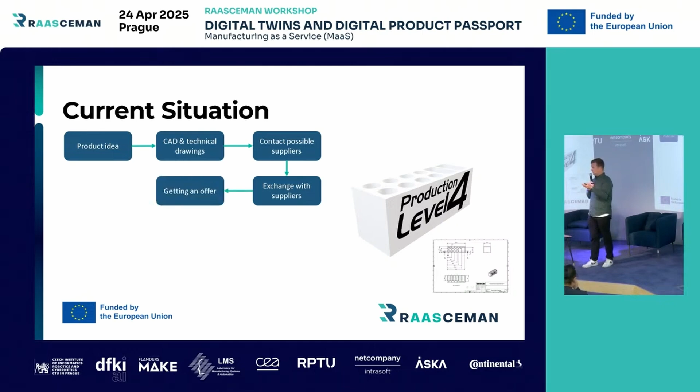After that, you get an offer. Then you decide on your side if it's good or not. When it's not good, you go back to the CAD file and take the idea or information from the supplier to redesign it every time. Or you accept the offer and let the product be produced for you.

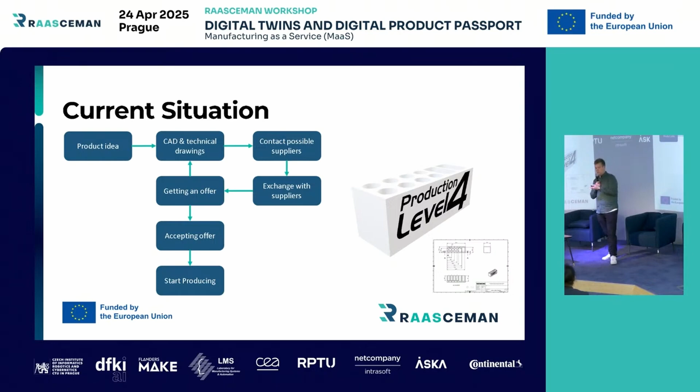Now I come to the theoretical part of manufacturing as a service. Manufacturing as a service is a digital marketplace for manufacturing capacity that enables the free capacity of your factory to be shared with everyone on earth. It's a global connectivity, and when the capacity is free to use, it's also on-demand production.

The advantages of this are cost-saving. When you are producing every time, you are making money in that case. The speed is also there because free capacity is used, and you also have scalability to different suppliers to produce the same part at the same time. There's also sustainability because there's no downtime where the machine is running.

After that, I will show you the requirements for such a manufacturing as a service. That starts with the lowest point, the Industry 4.0 component, defined in DIN spec 91345. It says that a digital representation together with an asset brings you to an I4.0 component.

This I4.0 component has the possibility to share your information to the network and can help you find the best capability for your product. The most common approach, in the opinion of RPTU, is the AAS for the digital representation of your product or machine.

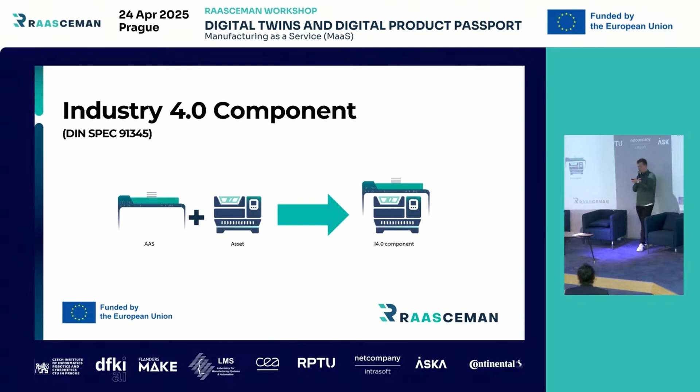And how you can scale this up - because here we're describing a machine tool, but a machine tool or milling machine is just one part of it. You also have tools for it, and tools can be represented as an I4.0 component too, as can robots, AGVs, and also a drilling machine.

These I4.0 components can also be known as cyber-physical systems, and each of them is also a cyber-physical system in most cases. But when you cluster it into a module, you bring more parts together to form a production module, to get more functionality of the product or of the cyber-physical system. When you have many of them in your factory, you can be flexible in every case because you just have an input and output for the production.

So how does the communication inside a factory, inside a CPPS, look? You have cyber-physical production modules with the AAS that I showed before, and also the real asset. The real asset has skills in our case. That's a little foreshadowing for the CSS model that I will explain later on.

The skill for a drilling machine is to drill, and it needs an interface. In our case, a common thing is OPC-UA, and with this OPC-UA interface, you get the operating data that you can measure or monitor from the machine directly to a database or MES system, however you want it. You also have a direct connection to an AAS server, where you can collect the lifecycle data of the machine.

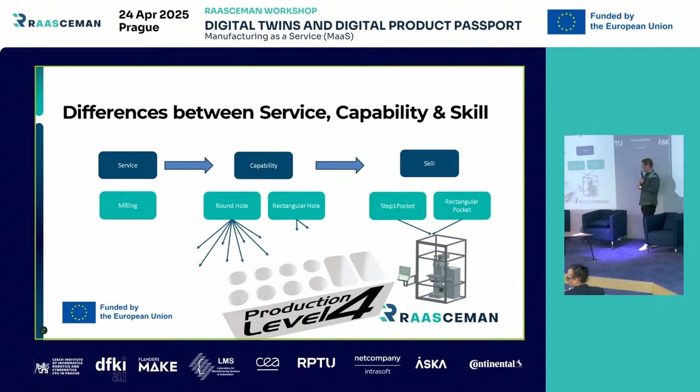For the idea, to show it in the first case, you see that the service is known as the milling service. Then the capability has different abstractions, like a round hole and a rectangular hole, which you see here also in the picture. The skill often depends on the resource - here, from the resource, the step one pocket and the rectangular pocket. That is a skill, and these are matched later on.

It could be one skill for one resource. The capability has a difference, as also with the service, in that you have required services and capabilities that come from the product side, and also offered capabilities from the machine side. Then you must match them to get an offer for the production later on.

So we are looking at manufacturing as a service at the capability level, because the abstraction is low enough that you can know the capability well when matching it, and it's also not so high-level a description that you don't know exactly what you are doing at this point.

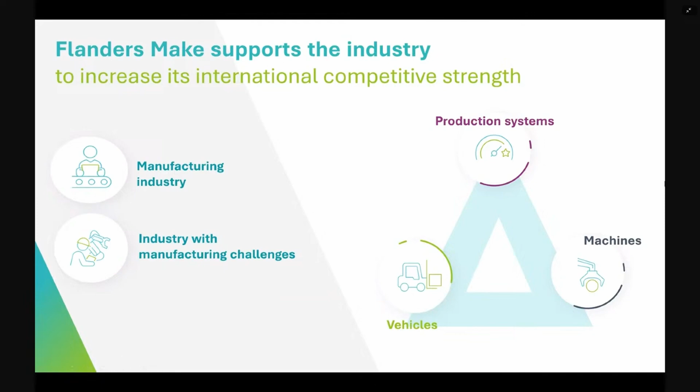I have some introductory slides about Flanders Make. We are an RTO of about 1,000 researchers in the Flanders area, dealing with research challenges in the manufacturing industry, or in industries with manufacturing challenges on production systems, on vehicles and on machines.

Let's now go into the content of the slides. I would like to introduce Sam from ÅSKA Bikes, who is a production manager, to introduce the product and the challenges of ÅSKA. Yes, hello, everybody can hear me? I will start, like Bart said, I'm Sam from ÅSKA Bike, and I'm the production manager.

What we do at ÅSKA Bike is make speed pedelecs. Speed pedelecs are bikes that are made to drive 45 an hour, and mainly in Belgium it's very popular as a mobility solution.

What we do that is different from the traditional bike market is we source our supply chain almost all in Europe, while the traditional market is like 90% in Asia. Some parts we just buy off the shelf, and the essential parts we have no own production for, but we have partners that produce them for us. We do the design, and then we have production partners. There we have the battery that is essential for us, the frame, and also the assembly we do in Belgium.

I will now come back in the next slides to the different components, and also to see the benefits of the digital product passport that we will introduce here for ÅSKA Bike, where we also see that we can introduce this in the assembly and the manufacturing of our bikes. So you can put the next slide, Bart.

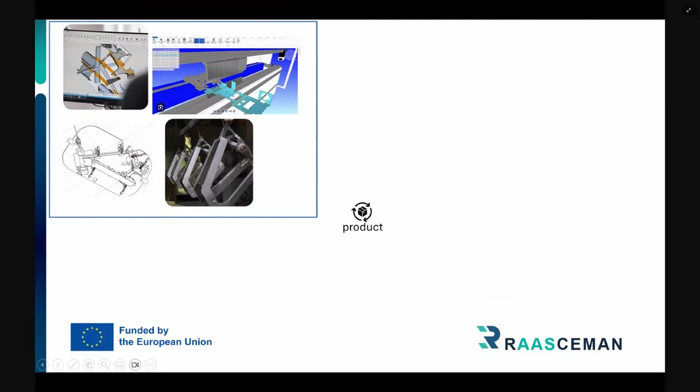The first part is our frame, which we now make with 2 different suppliers. There, for us, we do the design, we will have the CAD of this part, and also we will provide to our partners the digital process for the production, and also for the tooling. So in this way, by having this central in the digital product passport, we can easily share it with our partners. The same for the assembly.

There we have now only the instructions on paper, but the idea is to have virtual instructions for our workers. Because at the moment, we do this in Belgium in social economy, meaning these are less skilled people, and clear instructions are very important for us. And also by means of a digital product passport, we can put this to our assembly partner.

As we made a bike that goes 45 an hour, we have to homologate the bike. It's like a vehicle, it also needs a matricle. There, it's very important to have traceability of all our components used in the assembly, also which partners made our frames, which partners made our bikes, and did our assembly.

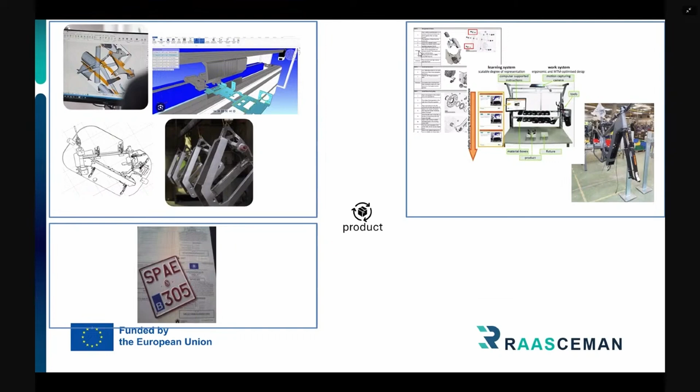This we can also have all gathered digitally by different partners, but on the same platform of the digital product passport. And then, of course, the next step is that people enjoy the bike, the riding, as this is a mobility solution. So people need a bike that is always riding and has no standstill, so it's very important to have predictive maintenance.

This we can also do by gathering data on the use of the bike, not only the kilometers, but we can really see this bike was used almost always in bad weather, or this bike was only used in good weather. This will also have an impact on which maintenance the bike needs. For example, the brakes will last less if it's used in very bad conditions.

And then, also using the digital product passport, we will have the instructions for the maintenance guys directly available, what you have to do on a bike. So there are different things we will use in the digital product passport, and also here we have the link with the MaaS network.

I think, as we have no own manufacturing facility, we need a lot of information from our partners, and our partners need information from us on how to build, and we need the traceability. That's why this can be very important for us, to exchange information with our partners.

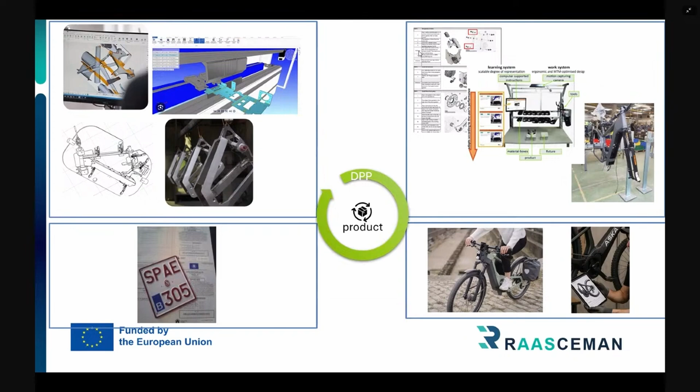I think this was just one click more, yeah. Then another component that is very important for us is the battery, because we make them also with a partner. We did the design, a partner in Belgium is making them, because it's very important for us that this battery can be taken out of the bike, and we can also repair it if necessary, because after different cycles we will need to change the battery cells.

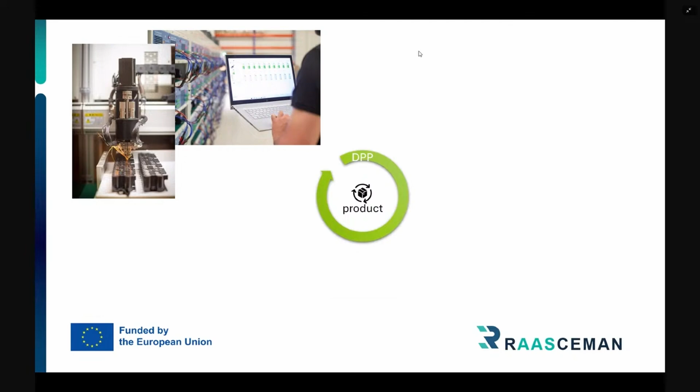It's the next, Bart. So this is very important, that it's repairable.

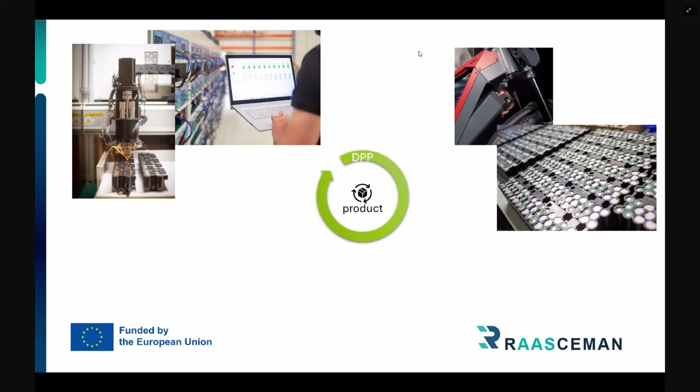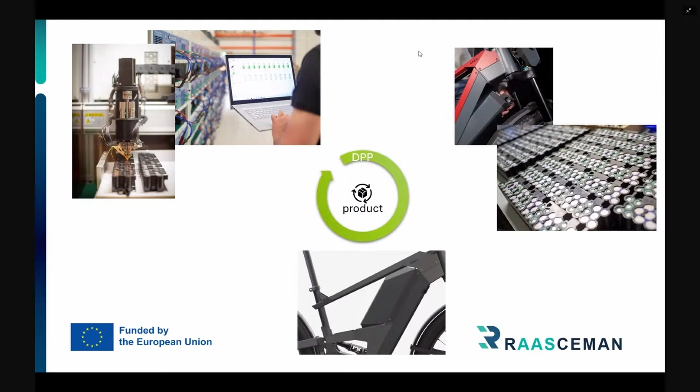And then, also, retrofitting is important for us, as we see this market is changing very fast. We started with 1,000 watt, that was the standard capability at that moment, and now we see bikes are going to 2,500 watt capacity. That's also why it's important for us that we can retrofit our bikes, and that's what we are doing at the moment. Bikes are coming in to have an upgrade to a 2,000 watt battery. And with a digital product passport, we can see this is this generation bike, we need to do this or that to do the retrofit.

If we look at what's most important for us with this digital twin or product passport, there are two levels. One is for sharing information with our supplier. As we said, we work with small orders on demand and have no in-house production, so we need to find new suppliers easily, and these suppliers also need to be flexible, as we are in a seasonal market. So we can use this platform to share all the information with them, and to get the information we need to homologate our bikes.

And another level is during the life of the bicycle, we need this information on the use of the bike to do efficient maintenance. This will also allow us to have other business models, like bike as a service, and there it's really important that this bike is always running.

And I think Bart will now explain more of the technical side of this digital product passport. Yeah, thank you, Sam. That should give everybody the necessary background to understand what drives ÅSKA and what the requirements are for such a digital product passport.

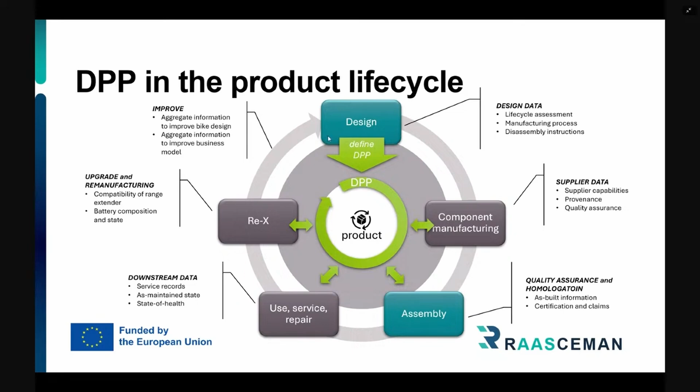Then finally, here we see an improved step as well, where we can couple back all the data to the design. That's a very important part - ÅSKA Bikes, for instance, can use this information to understand how fast components degrade and whether they should switch to different components.

So that's an improved cycle back to design that is only possible when you track the data across the entire life cycle. So, okay, let's take a step back. Where does this idea of a digital product passport come from? It is basically something that has been proposed by the EU and it's being enforced through legislation.

There's some regulations that make it mandatory to create a DPP, and that will make specific what must be on the DPP. The goal is to improve sustainability and circularity of products. That's the goal, but it's not made explicit by the EU how this should be done.

So this is something for us to figure out. The point also of the DPP is that we can scan the product - we can scan a data carrier like a QR code or an RFID, and then we arrive at this digital product passport.

So basically part of it is public or shared information. That's an important point, and it's a very explicit characteristic that allows us to use this data throughout the life cycle with multiple partners involved.

And a very important point is also that it is an identifier per product item. So each individual bike will have their own passport. That allows us to track the usage data for one particular bike, or the maintenance data, service records for one particular bike.

Okay, good. And basically you can divide such a digital product passport into a structure that is about model level data, batch level data, and item level data. Model level data could be, for example, disassembly instructions - it's valid for any bike of this type.

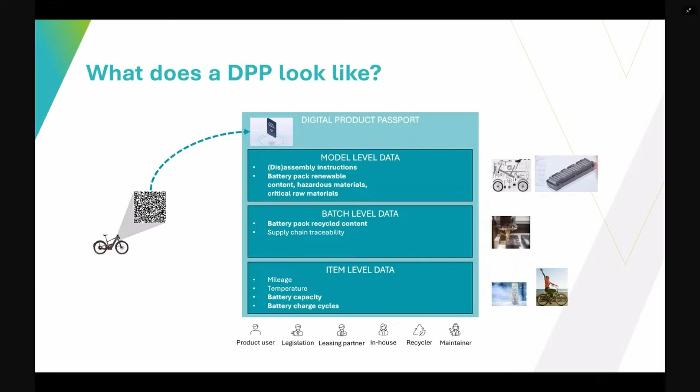So the digital product passport must be able to present several views on this data. We can generalize what we have seen earlier, as you can see here, that it's always about tracking data throughout the life cycle of a product.

Now, what is very important is that per product and per value chain, a DPP will look completely different. It will depend on what is useful for that value chain or for that product. For the bikes, for example, maintenance is very important, and tracking the supply chain is very important.

For example, a battery, then tracking the state and the material composition will be very important. So it's a little bit different. Now, for some products, it will be able to support new business models. For others, it is important to be able to extract the recyclable content. So it's a very different story per product.

The DPP is the responsibility of the brand that puts the product in the market. It's not really the manufacturer, it's actually the brand that puts it in the market. It could be a different partner, but in the case of ÅSKA, it's the same. And then we can share the data across all of these phases.

Now, in the past, there was a big emphasis on design data, for example LCA, recyclability, etc. And then there was also a big focus on upstream data, for example provenance of materials, energy use, recycled content, etc. And the goal was to collect this data and report on it. For example, you could say, okay, we can have a green label here because the total emissions are such and such. And this you could put on a digital product passport, and you can prove to your customers that this information is correct, that you can trace this back in your supply chain, and you could have, for example, a certification.

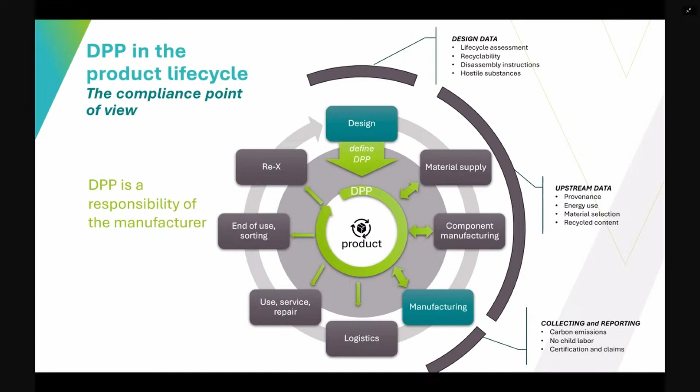So it used to be that digital product passports were very much focused on this upstream data in order to report or make claims about your product. Now, what is also very interesting, what has a lot of potential, is the downstream data. And this is what we have been focusing a lot on with ÅSKA Bikes as well.

The downstream data can help a lot with, for example, extending the lifetime of a product by servicing it well, by tracking the state of health, by having the as-maintained state and understanding well when to change something. So this is a bit of a shift. We come from a digital product passport that was tracking more the supply chain, and we go more to also including the downstream data. Now, well, if you create a report, it's a bit static.

Okay, so I'm going to take a step back first. When we look at the downstream data, this could be an enabler for new services as well. And this is one of the things we are looking for together with ÅSKA Bikes and a number of other partners in a different project. We are looking into, for example, a new business model around bike as a service. So that's an important thing you can do. And we see that only possible if you have the downstream data.

There's also some challenges with that. Before, if the goal was for the DPP to report and, for example, put a label on the products, it was a fairly static document that had to be delivered when the product leaves the gate of the manufacturer. Then you can compile all the information, collect it, and provide it with your product as well. What we see now is that we require a much more dynamic DPP.

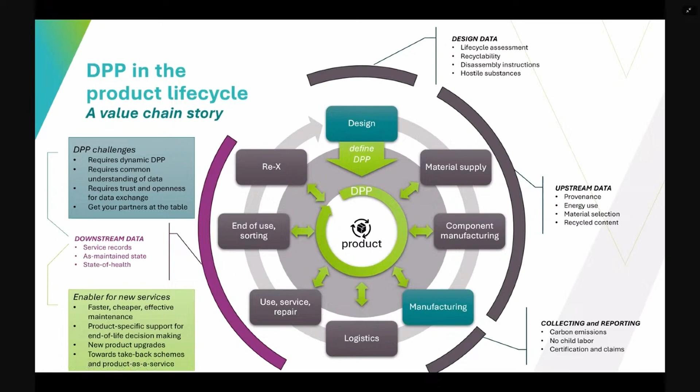So that's the consequence of this shift from upstream towards also more downstream data. This has had some technological consequences too, but that's a bit out of scope for today. You can ask me about it if you're interested.

In the case of ÅSKA, I can very quickly show you what this digital product passport looks like when you scan it as a servicer. You simply see the upcoming servicing tasks.

Very simple information, but behind it there's a lot of data sharing. In order to know that we need to replace the drivetrain belt on the 3rd of May, information is needed that comes from ÅSKA bikes, from previous servicers, and from the user with the usage data. Based on that information, this date is calculated.

The expiration date of your drivetrain belt is calculated. So here you see this ecosystem in action, where data from different partners is used on demand to provide new insights for one of the partners, namely the servicer in this case. You can also access the right documentation depending on the particular bike in front of him. It looks very simple, but there's a lot of data exchange and agreements behind this.

The goal here is to come to a win-win in the value chain where data and knowledge is shared among the partners. In view of time, I will skip this slide, but it explains better this win-win across the value chain between four different companies. This is an example where the digital product passport shines.

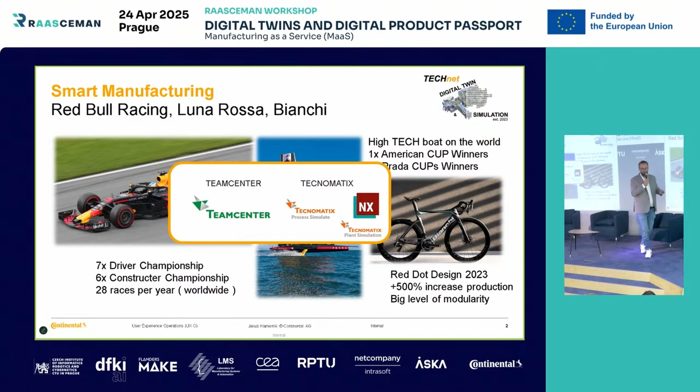What I want to mention here, Continental is on a good way, and I believe the academics here and all our partners too, because we are using the same software portfolio like these three very famous brands in the world. And coming back to the product lifecycle, Bart already spoke about the lifecycle.

We have a product lifecycle compared with the processes, compared with the tasks, and it's all described in several milestones which give hints about what has to be fulfilled during a product introduction to the market. It's a nice example of how we act, because based on our PLC, we create the digital twins. And digital twins - this is one of my favorite pictures, because we could spend additional 5 hours describing this picture.

But honestly, it's nothing else than the visualization of our processes, use cases, and the technology behind them. This is the process itself.

If you ask me how we use the digital twin in manufacturing, I can tell you that one digital twin is already our input, and this is the description of the product. Then we start with the value stream mapping - how we will produce. AMR, how we will transfer the material to the production lines. We design the production lines. We perform a digital lean check. Then VCOM - virtual commissioning - one of the key elements, and I will speak about it later.

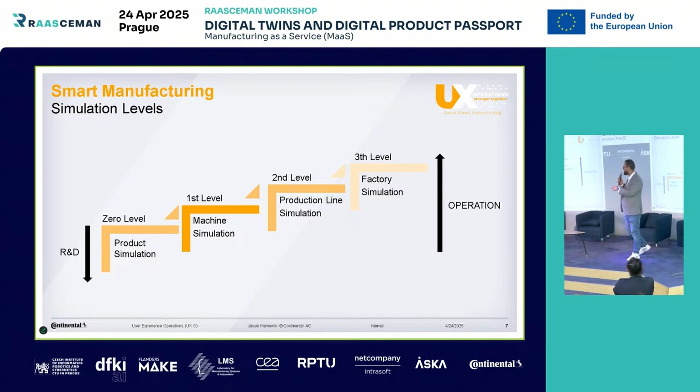Coming back to virtual commissioning - it's nothing else than parallel activities thanks to the digital twin in the virtual environment. Thanks to the cooperation with CIIRC, thanks to the cooperation with Siemens and other companies, we were able to achieve a 1:1 ratio. That means our production line acts 1:1 like in the digital world, and the same behavior was visible in the real world.

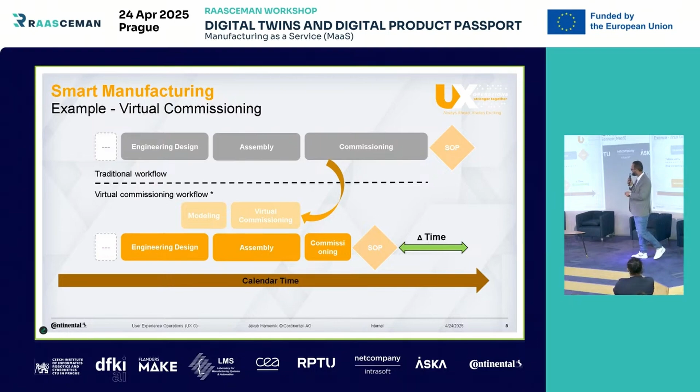My colleagues from RAASCEMAN have already seen this video here. Ah? Now, so I will come back. Can you switch? Yeah, perfect.

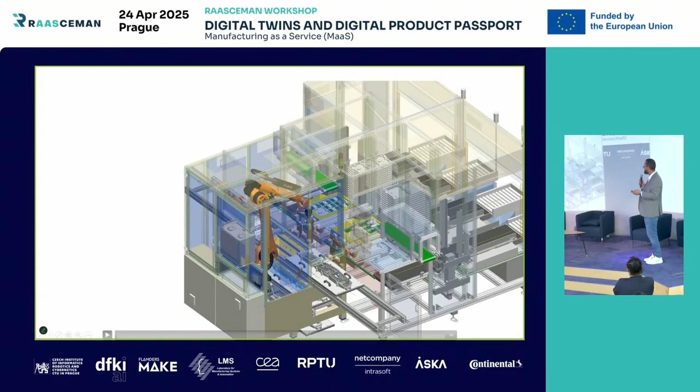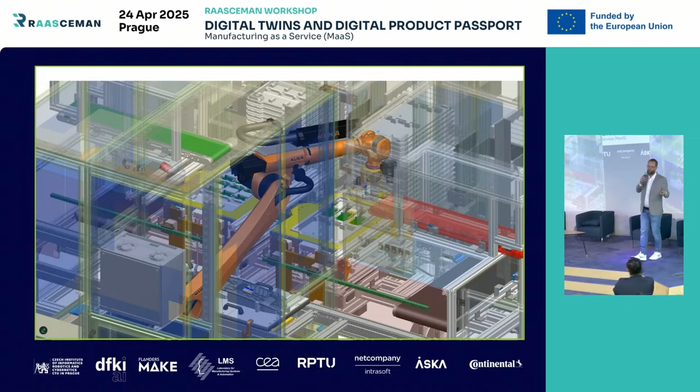Again, how we want to use the digital twin, especially for process description in the RAASCEMAN project - our use case, like an automotive partner in RAASCEMAN, we will focus with the team on operative production planning or rescheduling the production plan based on unforeseen events, based on our data, based on the environment, based on sources on our supplier side, and across the complete supply chain.

Here you can see the digital twin of the layout, which connects together 18 production lines, and you can already see the AGV running through the shop floor. This simulation describes the status for 2026, so we are already one year ahead. Now, thanks to RAASCEMAN, we are connecting this model across OPC UA with our real asset. That means in RAASCEMAN we will have additional information coming from production, showing how the production runs in real time.

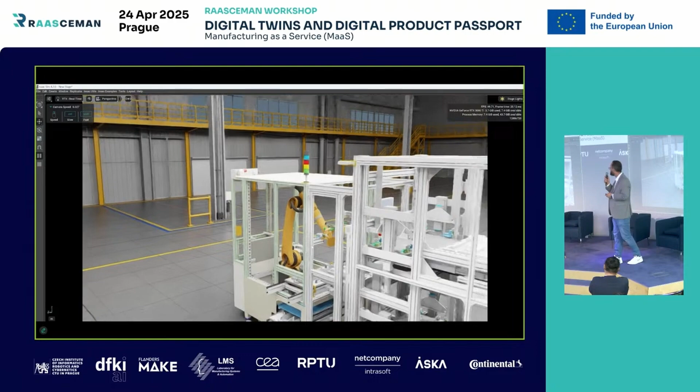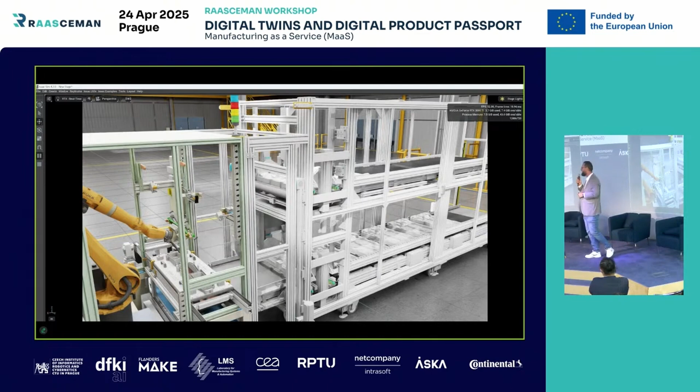And the video - I'm already done, Tomáš, you can go, this is my last video. This is the NVIDIA Omniverse, again, the complete 3D model connected to the OPC UA. We are collecting the data here each 100 milliseconds, not to crash the PLC, yeah? So it's not that nice, but finally, theoretically, you can go down to 1 millisecond collecting the data through the OPC UA. And then you are only visualizing it.

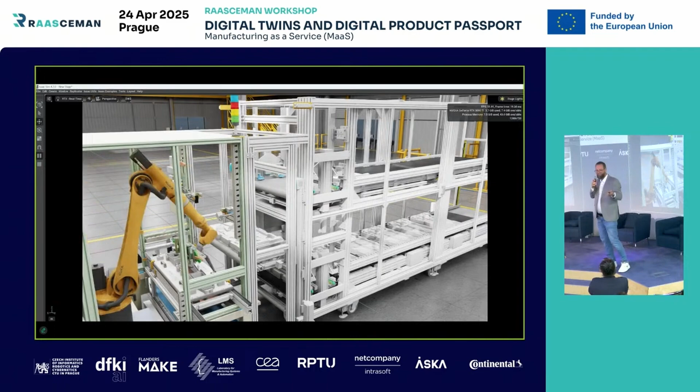NVIDIA, it's a visualization tool, like the graphic in Excel, always. And that's all from my side, so thank you for that. And now let's continue with the Omniverse, because Tomáš is the expert.

Okay, thank you, Jakub. Hello everybody. My name is Tomáš Jochman, and I am in direct contact with Continental AG. The slide in the presentation which was skipped was also called end-to-end simulation. I think this is your term, which you introduced into the industry, and now we are trying to make the new end of end-to-end simulation with the NVIDIA Omniverse.

So now I will show you what are the challenges, use cases, and how we dealt with them. As you can see, the current state of the simulations is basically rigid body simulation. We can connect PLC, HMI, AGVs, everything into one simulation. But in reality, there are also some other tasks which were not possible to simulate yet. And why I'm saying yet is that one of the tasks is machine vision, or simulating cameras, and it's necessary to have a photorealistic environment where you can actually do it.

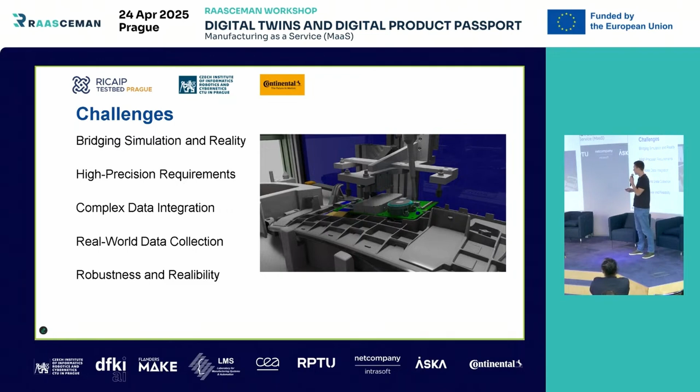So to overcome these challenges, we focused on direct connection of the workplace, the robotic workplace from Continental, into NVIDIA Omniverse. As you can see here, it's not, I would say, that good like on a PC, but you can see that this environment enables showing shadows, reflections, light sources, and all that stuff from the real world, which are not possible to simulate yet directly within the production equipment.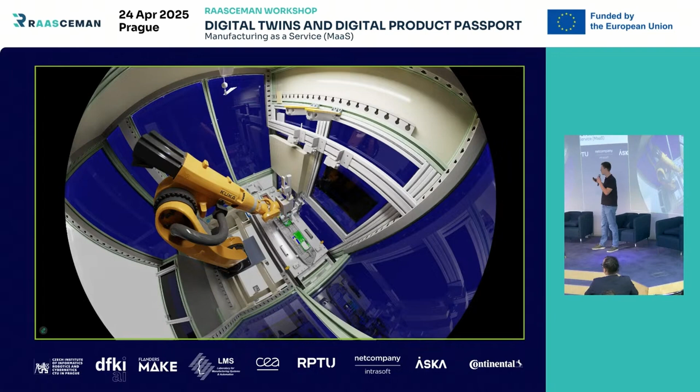So thanks to this visualization platform, we use this solution to design our methodology and implement AI models for vision tasks. And thanks to this, we can collect the data from the simulation, train our models, and then also validate it in real production.

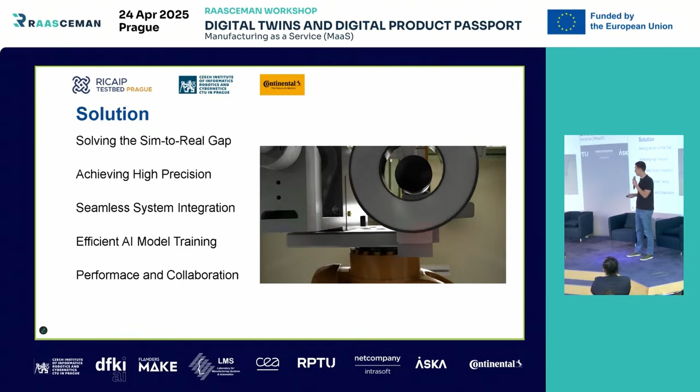This platform also enables rapid performance in comparison with other softwares. For example, now we are working on a project where we are running graphical calculations not on CPU but on GPUs, and we got 20 times the speed for the simulation necessary. So that's a rapid decrease in computational load and everything.

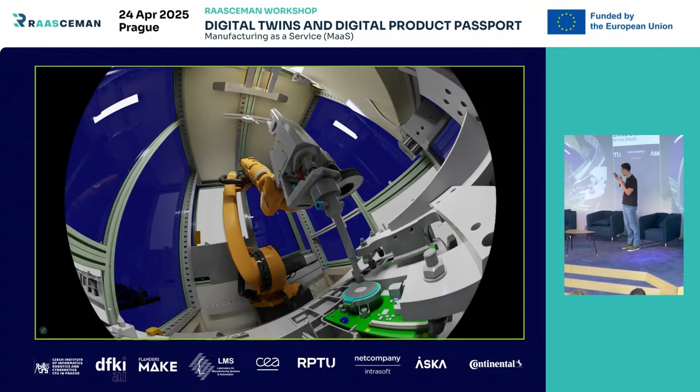And as you can see, I will show you a video now where it's described in one package, and this is the workstation we focused on. It's a robot equipped with a tightening system, basically a screwdriver, and a camera system. Why is there a camera system? Because each part has its tolerances. PCBs and all the covers are manufactured with some tolerance and transported within some destination, also with another tolerance. When you sum it up, you need to have the camera on the robot because it's a really precise task to do the screwing.

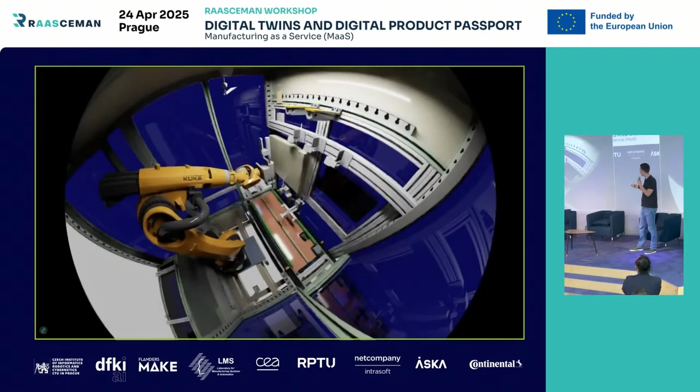So do we also have sound here? Yeah. Step into the metaverse with a digital twin.

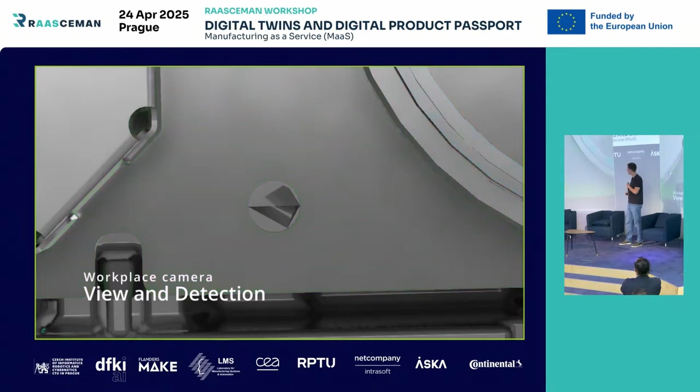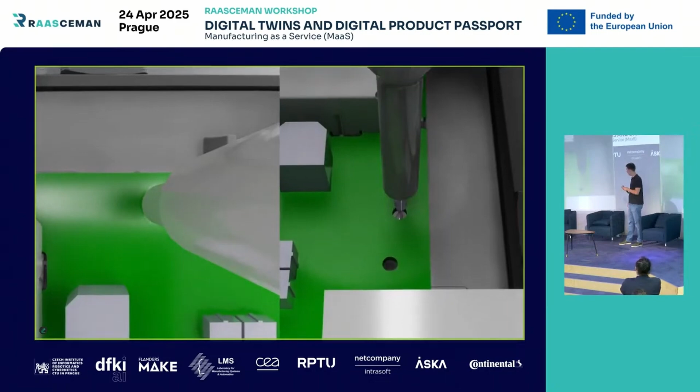In a virtual environment, accelerating development and ensuring high accuracy without physical limitations. And with real-world data, refining the model, simulation and production come together, unlocking true industrial intelligence.

So as you can see, now it looks like almost all the problems are solved, but it's not, because this was just a 2D application. We were trying to figure out the translation and rotation of the part, but we would like to go even more into depth. That's 6D pose estimation algorithms to find the part in space, and it's a bit more tricky, but we also work in this area, and I think in the future it could definitely be used in production.

Another short video. 6D pose estimation is a critical task for pick and place. Sorry. Let's try it again.

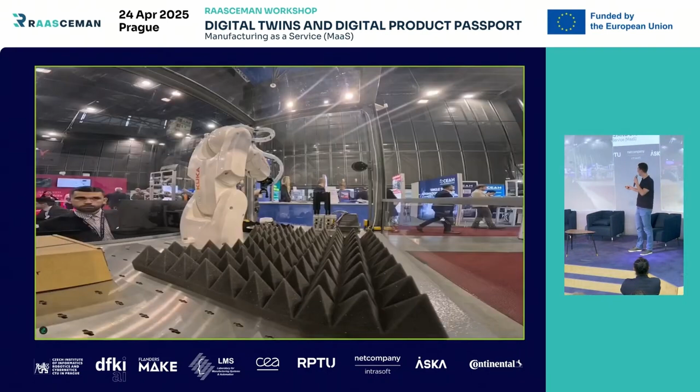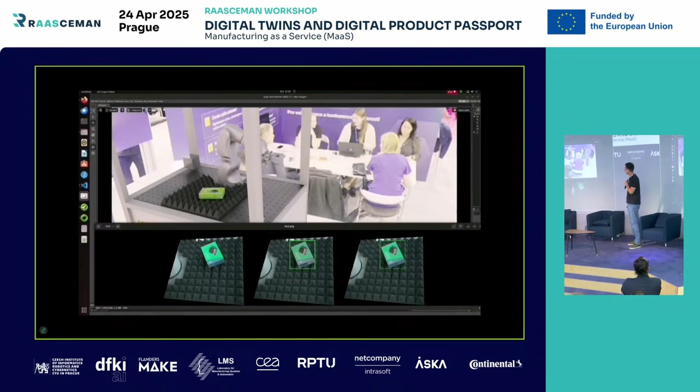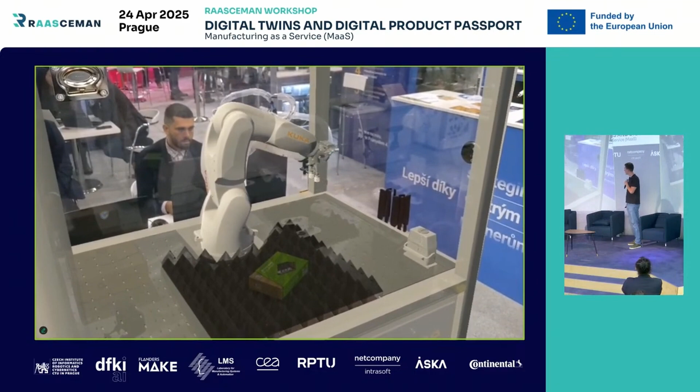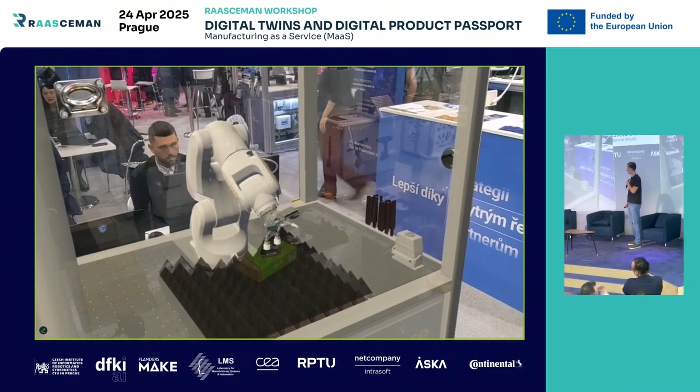6D pose estimation is a critical task for pick-and-place applications. It can now be solved in the industrial metaverse and even enhanced with AR headsets for real-time operator guidance. In the metaverse, we project the real workplace. AI algorithms detect the object in the physical world, replicate it virtually, and simulate the entire process in real time. If the operation is validated in simulation, the task can be sent directly to the real robot or executed fully autonomously. This seamless integration bridges simulation and reality, delivering safe, efficient, and intelligent automation.

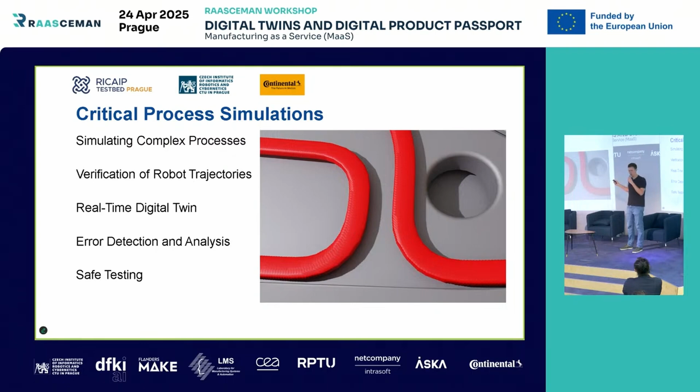This was also really, I would say, an important step toward the future, but there are a lot of other processes which were also not handled yet. But we found out that within this platform, it's also possible to do multi-physics simulations. That means you could simulate things like adding material, the exact physics behavior of the material. Here is a showcase from a gluing station at Continental. As you can see, it's also possible within the robotic system to simulate the gluing, which is quite new and I would say really useful for the future.

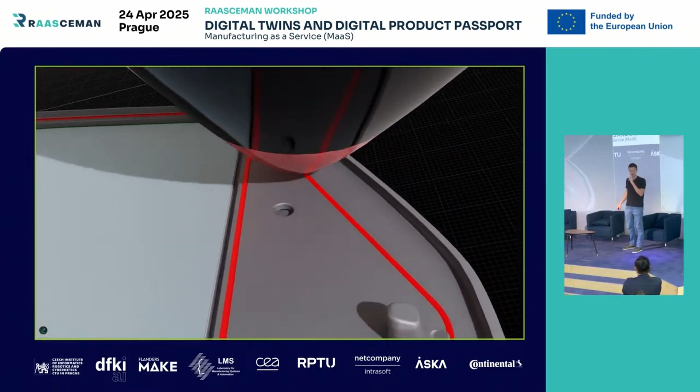So that's everything from my side, and thank you for your time.

Thank you, Tomáš. Thank you, Kuba. I think it's amazing to see what technology is coming up, and I'm really happy to see the collaboration between the universities and the real shop floors that we saw.